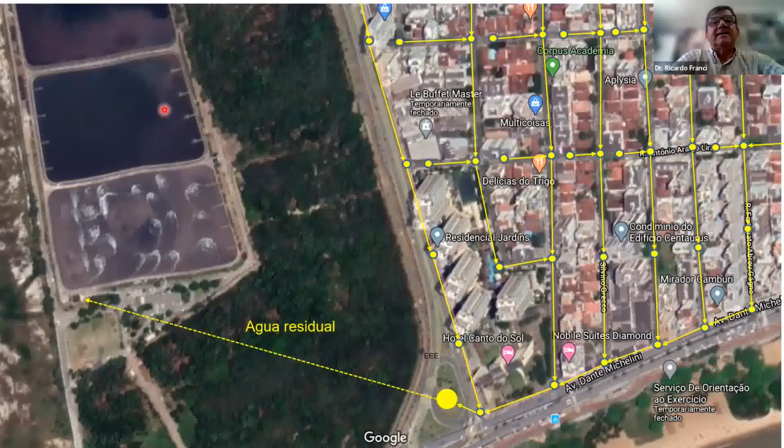If the idea is to practice reusing urban wastewater, it is necessary to produce good quality reuse water, and this water can come back to the buildings in a water supply network, which would configure a double network. This is an issue because it becomes too expensive to build and bring the reusable water back towards the residencies.

Thus, we've considered as a more simple solution to practice reusing water at the building level, at the edification level. And thus, we are working with this idea of separating the different water currents in the buildings themselves. And then, of course, greywater has a strategic interest due to its characteristics of quantity and quality.

So this becomes a model that has been conceived and developed by Professor Ralf Otterpohl in Germany, who proposes a system for drinkable water that comes in from a public system. Number two would be blue waters, which would be rainwater, where in Brazil, depending on the region, we have very intense rainwater, and it must be considered.

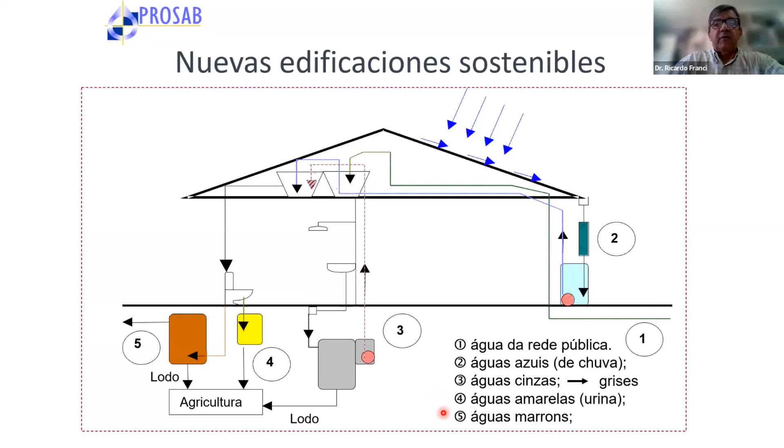Then we have gray water, which is produced constantly, and thus it is interesting to consider this source for the case of reusing. And then you see different additional currents, the yellow water and brown water, which together make up what we call black water.

Based upon this model itself, in 2019, in Brazil, we have carried out the first technical norm and regulation for the use of alternative water sources in edifications and buildings. This is a very important point for the practice of using alternative sources of water in Brazil, because up until this year, there had not been a regulation or a norm to cover those who were truly interested in making the most of this alternative source of water.

So in our new norm and regulations, we have sources of rainwater, pluvial drain water, phreatic level water, clear water, light gray water, dark gray water, black water, and residual water, as potential water sources for different edifications. And these are authorized.

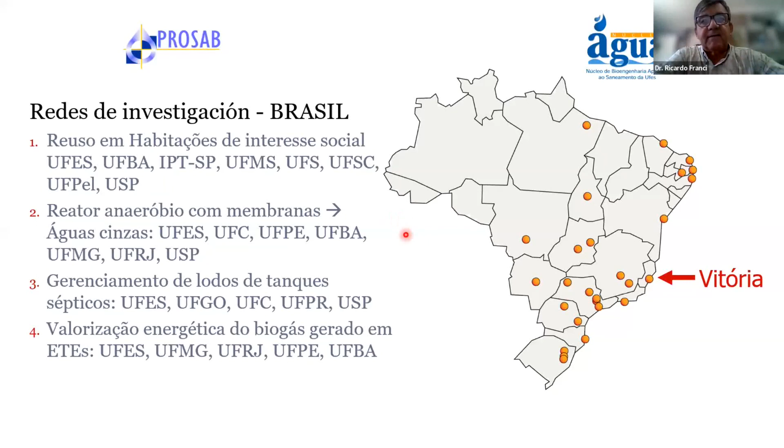I had the possibility of coordinating this national network for 5 years, with results that we consider of great importance and which are even the basis of the new Brazilian norm for the use of alternative sources of water.

I will present a summary of our main results, the results of these research projects. The first investigations were concentrated mainly upon water conservation in these different edifications. And well, the main point here is that water conservation becomes the result of a decrease of the demand and an increase of the water offer.

So to decrease water consumption, it becomes of great importance to work with water saving equipment, loss reduction, sectorized consumption to be able to use correctly, and combat waste. And on the offer side, we have talked about making the most of rainwater and other water groups which are alternative water sources.

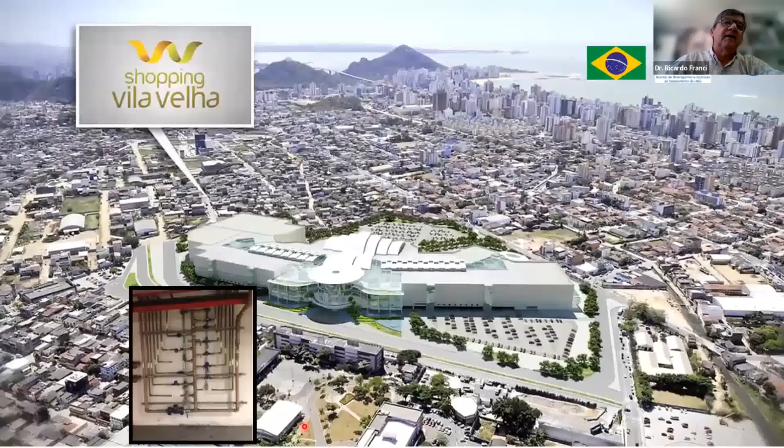An issue I believe that is important. We worked with this Austrian software, which is free and thus can be used after a well-detailed measurement to be able to build this graph correctly and identify the different pathways of water in a building.

Well, our research team has also worked on several edifications for residential buildings, where the idea of the reuse of greywater is to change the water sanitary system. We go towards segregating and separating greywater, which would be the product of the water use due to showers, washrooms, the washing machine, to be able to produce clear water and thus treat at a greywater treatment plant, and to use this water

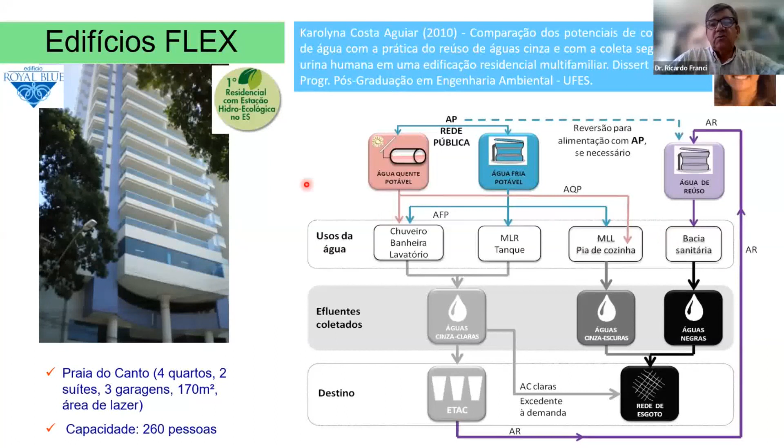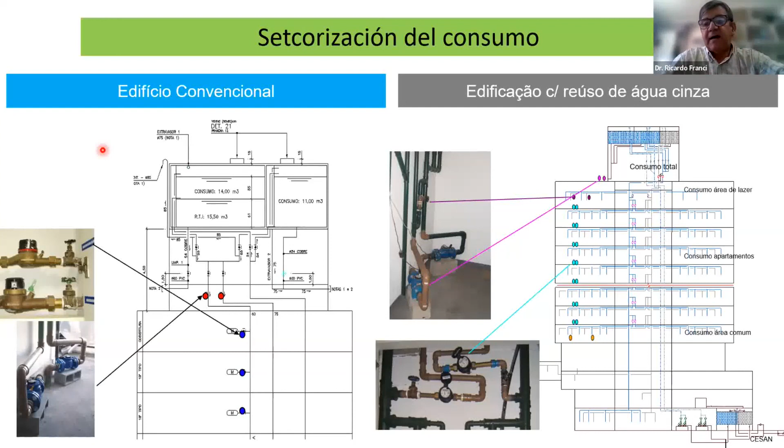for the sanitary discharge. So this becomes a model which today brings us many buildings in Brazil which are practicing water reuse on these types of hydrosanitary systems. And for this purpose, for those who know the pathways of water, it is important to apply sectorization. So, these types of practices of reusing greywaters demand joint work of multidisciplinary teams with architects, engineers, treatment biologists and chemists, so that projects become complete enough.

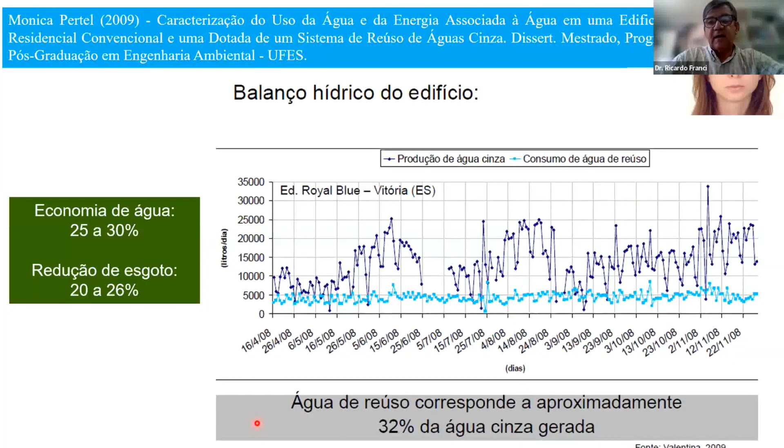especially in Brazil, where water flows that come from the showers are quite high, and in general, the consumption per Brazilian capita for showers is quite high. So it is impossible to reuse this whole flow of greywater because there's not enough demand. And reuse waters correspond to 30% of greywater collection.

Another important point is characterizing greywater. And since 2005, we've worked on characterizing different greywaters, different edifications, different regions, different levels of our population. Greywater from one building where rich people live would be different from the greywater produced, for example, in the dwellings of the poorer families. So it becomes of great importance to know the characteristics to develop treatment strategies.

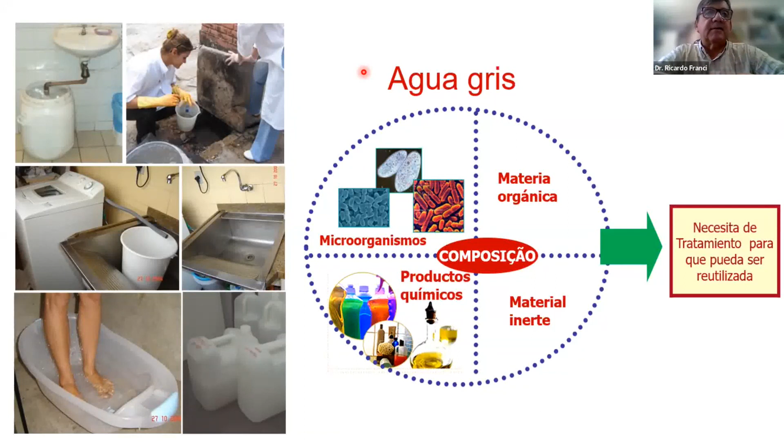So, in summary, greywater contains microorganisms, organic material, chemical products, and inert material. And it's important to carry out a good treatment. We have different sources of greywaters. For example, the washroom, showers, this is for clothes, this is for the kitchen, and there's a mix of water consumption.

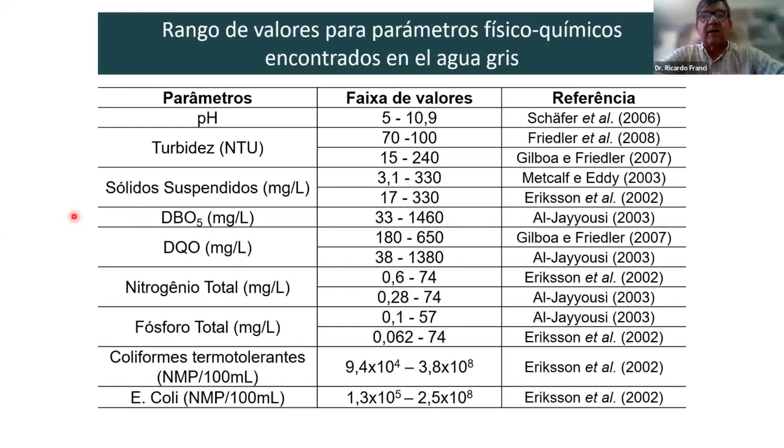This is just a summary of several of the publications. It is important how greywater has very little nitrogen, and that's why it becomes important to calibrate this relationship with phosphorus. Because if we don't have an adequate carbon, nitrogen, and phosphorus relationship, we could have biologic growth issues. And if the treatment practiced is biologic, we could have growth limiting issues. And finally, we will not be able to achieve an adequate efficiency.

The main point is that at the end, water has to have nice characteristics for users. This becomes of great importance to avoid rejection. At the beginning of our research, of our experiences, we thought that a very simple treatment system may be interesting enough.

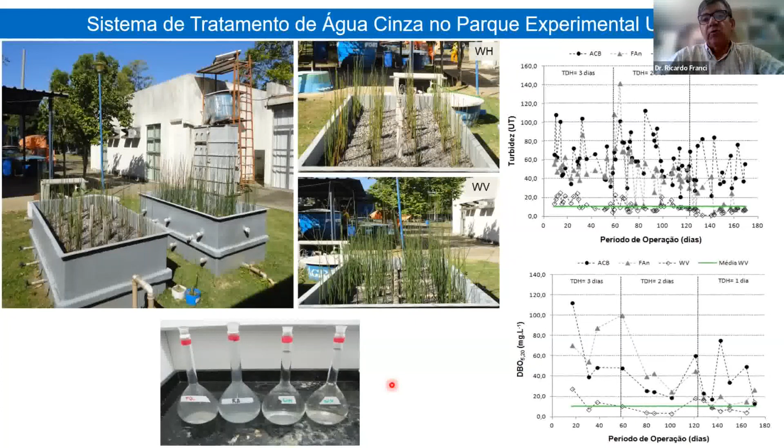However, reuse water with a bit higher fogginess is a bit more complicated for users, who in general would reject this water. So in this case, it becomes difficult to produce reuse water for very sensitive systems. This is an important point.

The reuse water has to be very similar to drinkable water so that users do not perceive an important difference between them and do not reject reuse water, because a system where users have questions about the water or its quality is not sustainable.

People usually are more concerned about the organoleptic properties of water, whereas for technicians what's important is its content, which can have, for example, pathogens. It mustn't degrade water use, but for the users, what's most important are organoleptic characteristics.

Our experiences with treatment. Well, water treatment can be done with physical, chemical, and biological processes that can be associated. The important point to note is that reuse water can't have an unpleasant odor or a high cloudiness, because if not, it will be rejected by different users.

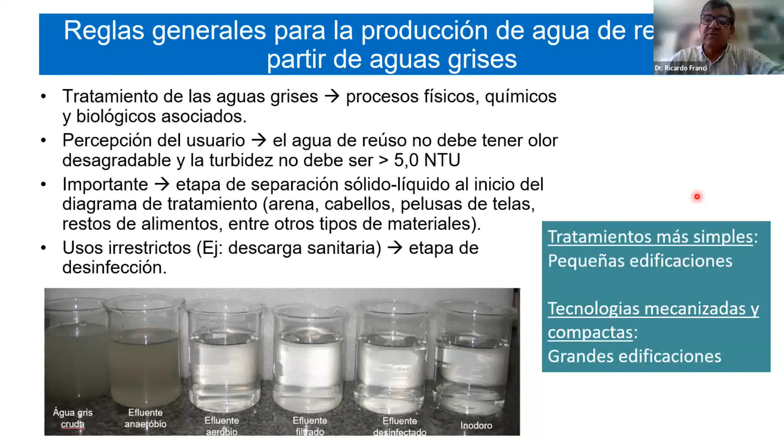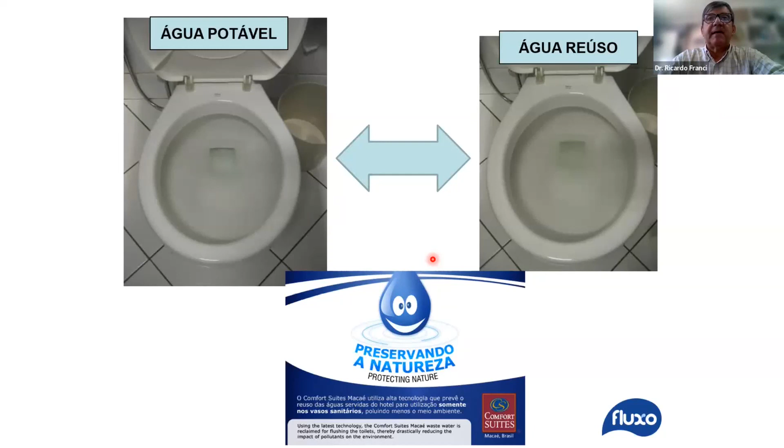Another very simple rule is that for one-family dwellings, it becomes possible to use simpler systems, like, for example, wetlands. Now, for multiple-family dwellings, the capacity becomes important, and in this case it becomes necessary to mechanize different systems. The main point here is that we must always consider the possibility of rejection by users due to perception issues of bad quality.

In Brazil, there are many, many gray water treatment plants. Physical-chemical is like for drinkable water, with the use of coagulants, decantation, filtration, and finally disinfection of the water. In gray water treatment plants, ETAGs in Portuguese, the physical-chemical methods are cheap, but need constant supply of coagulants and chemical products. Additionally, they are not capable of removing organic material that is dissolved in the water. So that is the main issue.

If water will stay for a period longer than 24 hours, for example, in different reservoirs, there may be a possibility of smells. Thus, we have to consider this point. The different biological treatment stations in general are more expensive due to implantation and construction, but are cheaper in the long run for operations and maintenance.

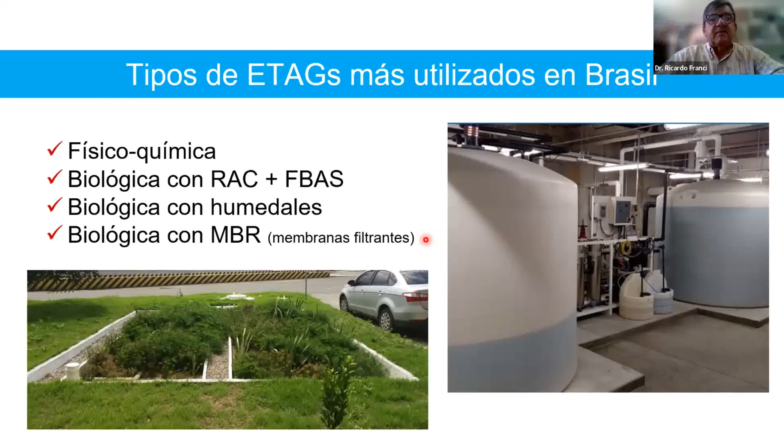The stations with wetlands are usually cheap to install and operate. However, in general, they use very large areas. They usually are used for smaller water flows. And finally, there are gray water treatment plants in Brazil with filtrating membranes, but Brazil does not produce its own filtrating membranes. Thus, it becomes an issue for maintenance of the stations because it needs to import them. However, these are very efficient stations, even though they consume an important amount of energy.

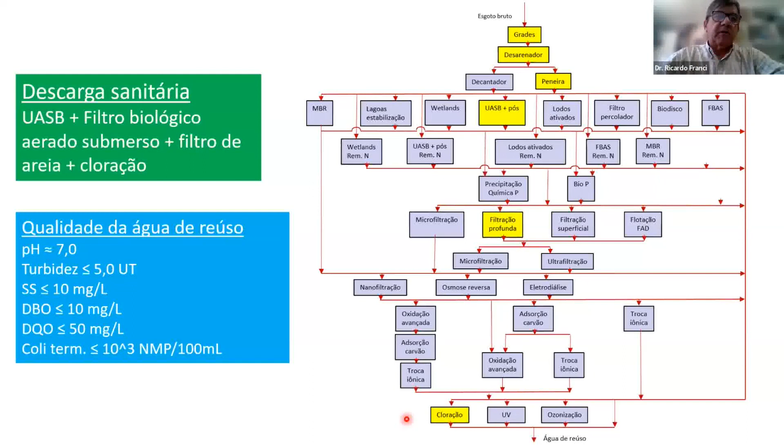So, this is just a quick scheme of the different possibilities of combining processes: for example, preliminary treatment, which would be screens and desanding, then biological processes with filtering, and finally chlorine application for disinfection, where there are different alternatives, evidently with different costs associated to them, according to the complexity of the technology. I've only talked about membranes, which are very efficient. However, they are expensive, and in Brazil there is this issue of import.

In this program of technological development of the federal government, we have developed a technology for biological treatment that combines two high-rate reactors, in other words, with short water retention times, which at the end allows gray water treatment plants to be compact and small enough.

And here we have, and consider important, an anaerobic stage, because even though gray waters aren't as concentrated in organic material, this stage allows elimination of, for example, 50% of BOD without air, without the need for mechanizing. The removal of 50% of organic material is important for the economic viability of the project, because power consumption weighs heavily on the economic viability of reuse.

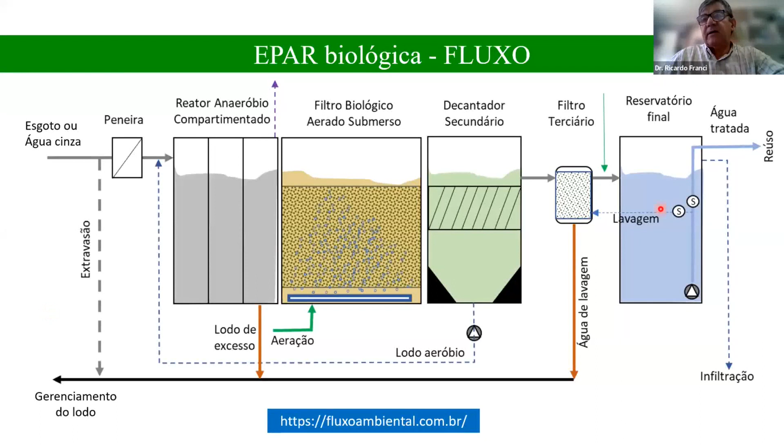After the anaerobic stage, there's an aerobic stage, in which we work with biofilm reactors. Here we have a biological aerated submerged filter. Then we have a secondary decanter, a tertiary sand filter, and disinfection with chlorine at the end. And well, the wash water and the discharge of biological sludge usually go to sewage systems. And at the end, we have our reuse water ready.

This combination of processes can generate very compact stations, like in this case, as presented here. Here we have all of the biologic processes. This would be the gray water mesh, the biologic processes associated to them, the sand filter, and the chlorine application. And these graphs present the results of the treatment.

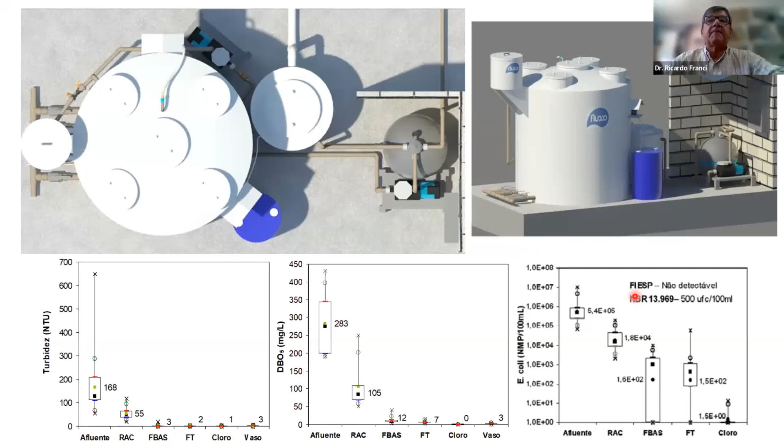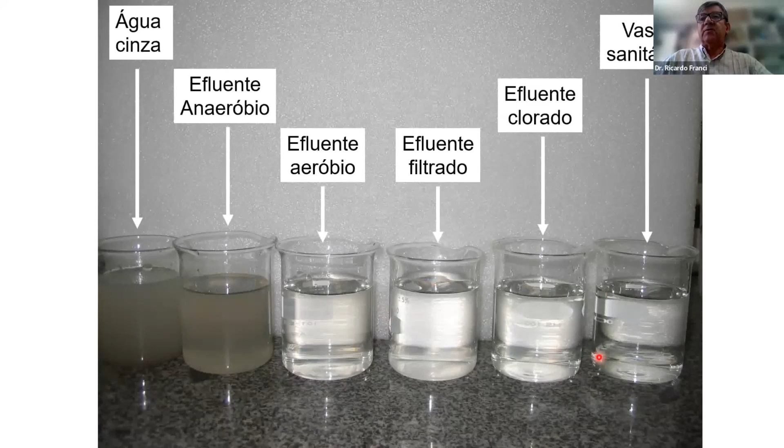So we have cloudiness, where in the glass, the last step would be for toilets. So we have the different stages, anaerobic stage, filtering, disinfection, and quality for flushing, with cloudiness and bacterial counts in control. And this would be the usual aspect of gray water over the different water treatment stages towards its final use for flushing toilets.

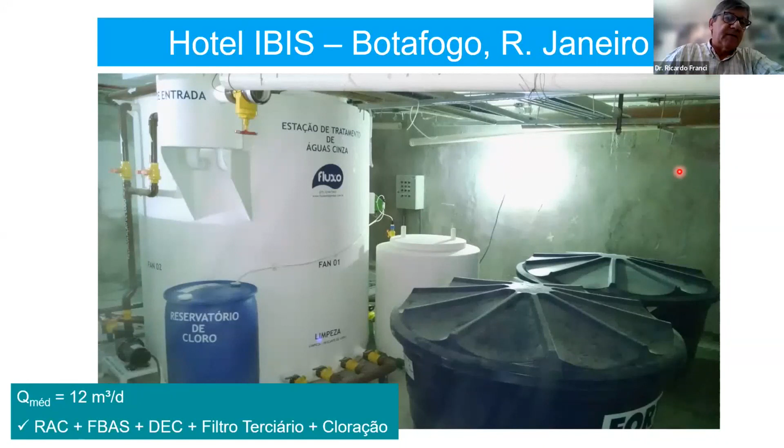Here we have the plant that is installed in a hotel of Ibis in Botafogo, which is a Rio de Janeiro neighborhood. It is a plant for 12 cubic meters per day, and the point of economic viability, which for us is of great importance. Today, our company, when a commercial technical proposal is made, always presents to clients a preliminary study of economic viability.

And this study was carried out in 2004 by the construction company who built this building. It is obviously a complex table with many figures, but of great importance is to notice that among all the investments to build this edification, this full water reuse system presented a cost of a little bit more than 1% of the cost to build. So of the whole 5,500,000 reais, more or less, the Brazilian currency, a little bit more than 1% is equivalent to the value of the whole reuse system.

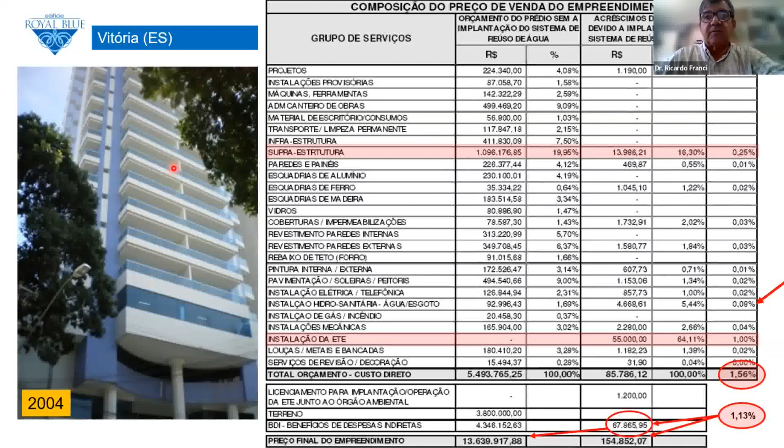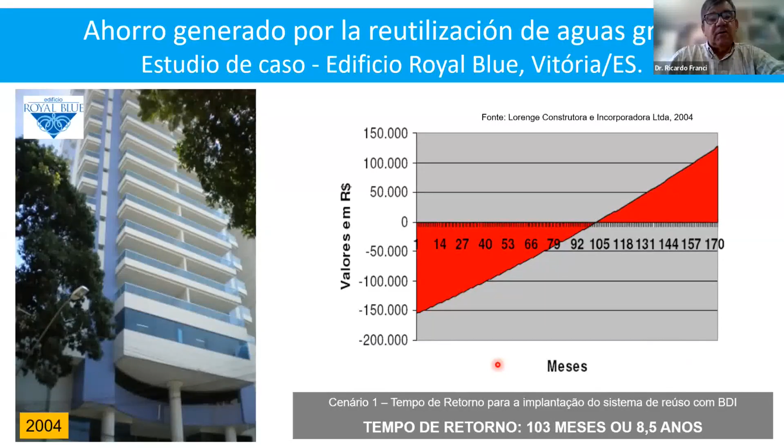Even the change of the hydrosanitary system to separate gray waters and black waters, and supply of drinkable and non-drinkable water, and evidently the water treatment station. The same study presented a cash flow, the payback, which was calculated for 8 years and a half. And in practice, the payback in this case was 7 years. Well, the system is exceeded after 7 years of work and functioning.

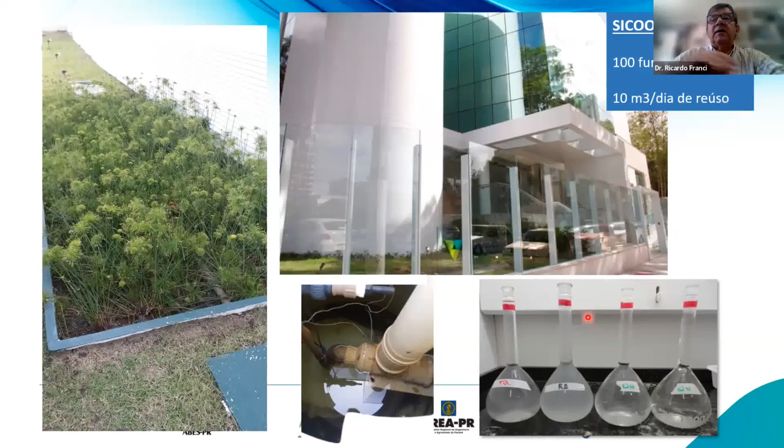Well, I will go to some examples very quickly. For smaller systems, we work greatly with wetlands. We like these technologies very much because they are very simple. The operational demands are small, and the owner of the building in general is very satisfied with the end results. This is a bank, a financial bank, which has 100 workers, and the use is 10 cubic meters per day.

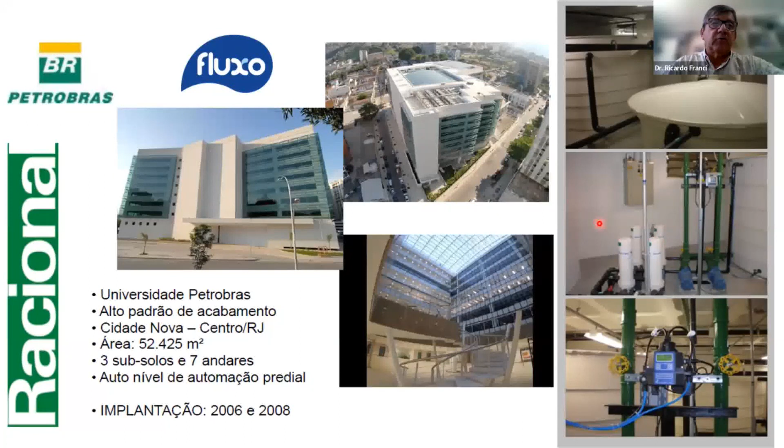We've carried out larger reuse systems, like, for example, this is the Petrobras University, Petrobras being a large Brazilian oil company, and its building is in the center of Rio de Janeiro. It is a system that produces water for reuse and which also has an expert system for monitoring the quality of reused water, and to authorize or not its correct use in specific systems. In this case, with a cloudiness meter, here we have different filters for producing reuse water. Another system, with interesting capacity, 70 cubic meters per day in the Rio de Janeiro center.

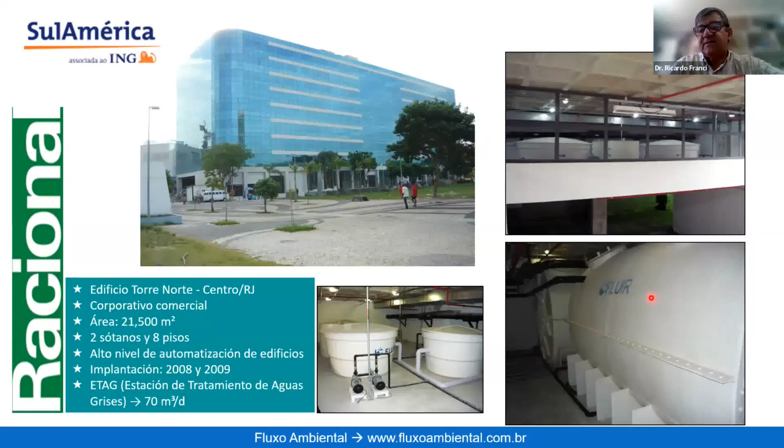These are curiosities, because sometimes builders, constructors and architects make their projects thinking of reusing gray water and reusing rainwater. However, they do not consider the technology for treatment, and installing a water treatment system becomes complicated, because during the project itself, they didn't consider an area or adequate access for the installation of the treatment plant. So this is an issue. For example, this tank here is cut off because architects and engineers forgot to build an adequate access for transporting these tanks. So an issue which is very common.

Another large building, another Petrobras oil building, for 3,000 employees. And in this case, we didn't use gray waters. The wastewater was a mix of gray water and black water of the whole building, and for this reason the treatment system is more expensive and more complex, to be able to produce reuse water of high quality. Where does the water go?

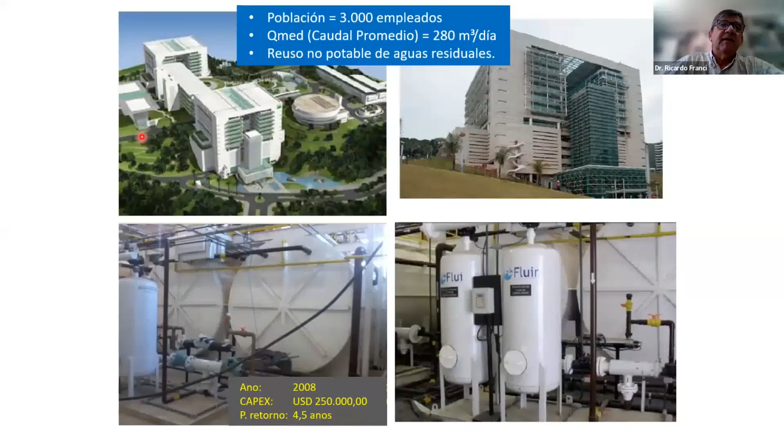Towards irrigation of the whole hard garden and the flushing of the toilets.

Another system for Rio de Janeiro, where this becomes a building that makes treatment...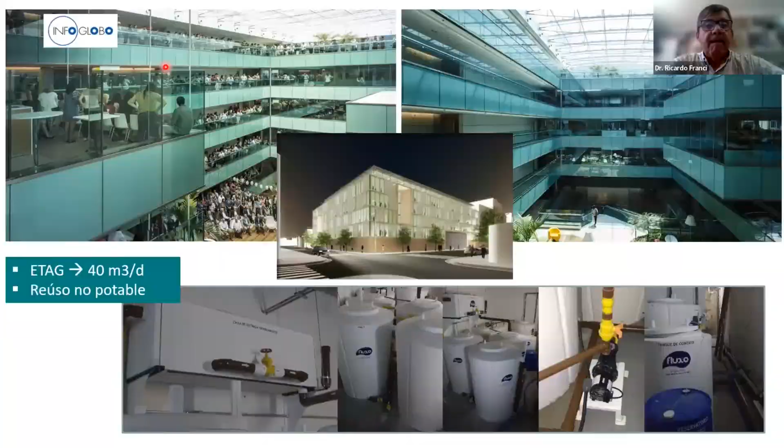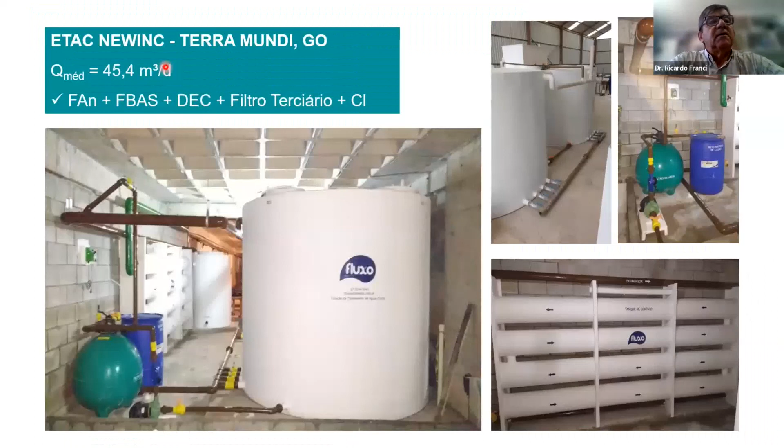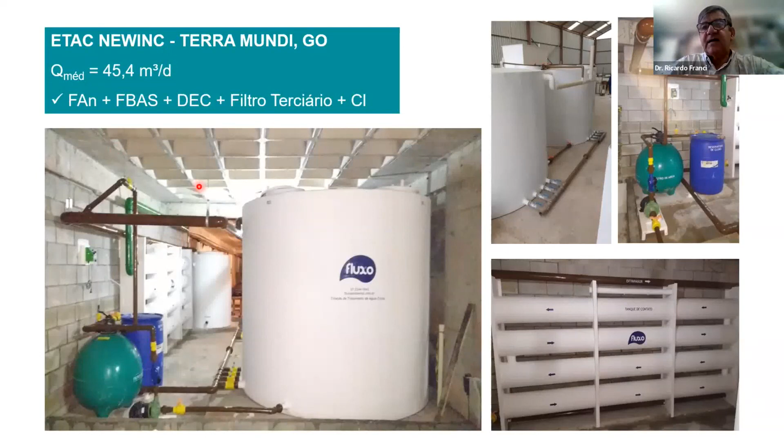for a large television network in Brazil, another corporate building from Petrobras in the city of Salvador in Brazil, 7 cubic meters per day. We have different examples of gray water use in buildings in Brazil and many regions of Brazil, always with our biologic-based systems with tertiary filtering and chlorine application.

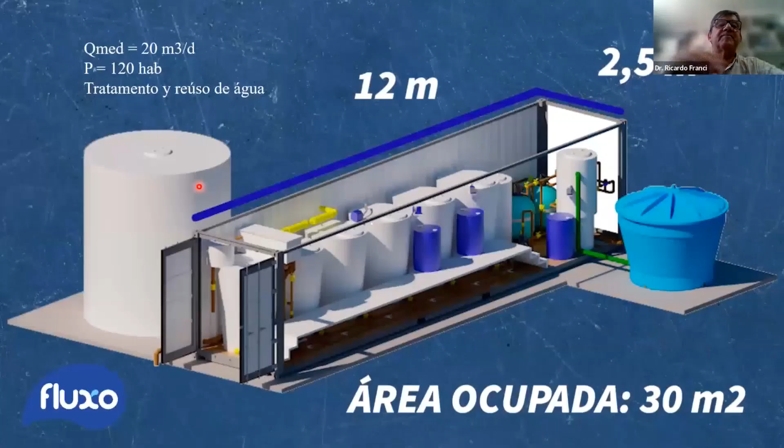And we also have gray water treatment stations in some of the important industries, for this case, of the center-west region of Brazil, where it becomes very common to have a period of 6 months of intense precipitation, and a period of 6 months of drought, a characteristic of this region. That's why the reuse of gray water.

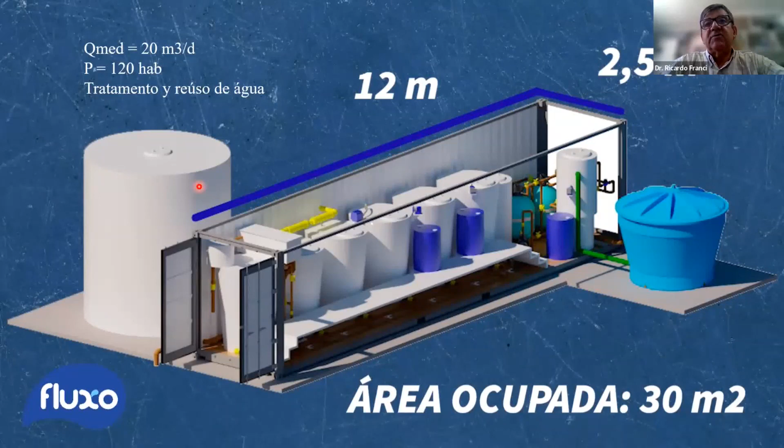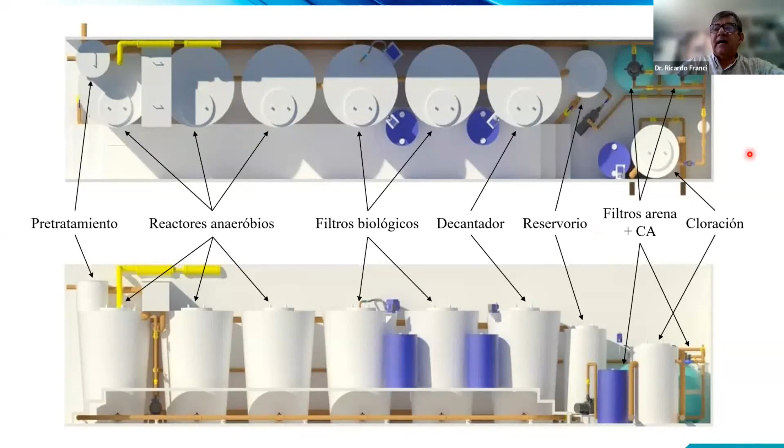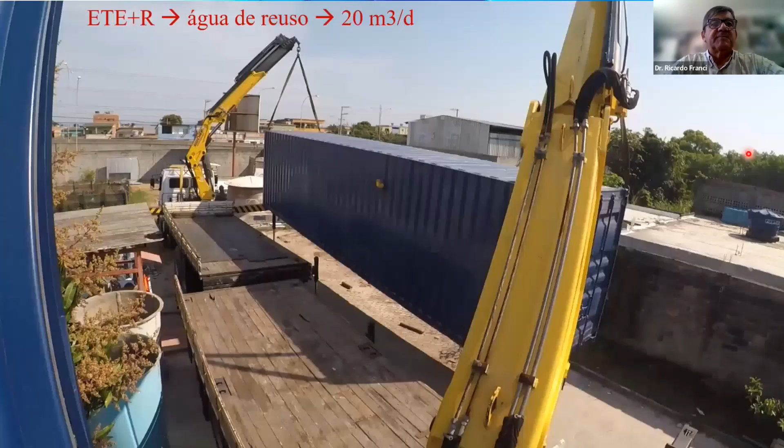And today we also have a more container-based solution, able to transport all of the water treatment stages installed inside of a container. Here we have pre-treatment and anaerobic reactor, the decanter biologic-based system, reservoir for pumping water to the filtering station, and finally chlorine application. This is the aspect of the plant, the depurifying plant inside of a container, transported and installed on site.

The arrival at the functioning plant is for an industry of Rio de Janeiro also.

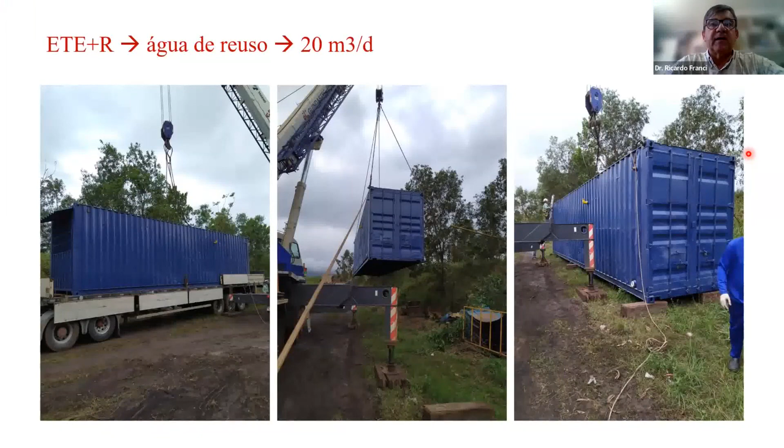And likewise, we have done different production plants for reuse, starting from gray waters, for the Antarctic station in Brazil, the Brazilian Antarctic station. Here a combination of gray water reuse, which is part of the system, with the black water treatment, which is very sensitive for its application.

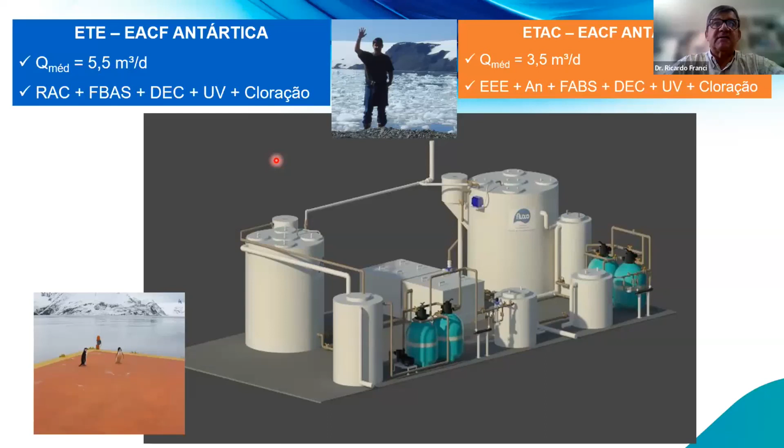And even though it seems incredible, 10 years ago or so, we had serious issues with the availability of water for feeding our Antarctic stations.

In other words, the use of these sources does not necessarily mean it has to be done today. This is a decision of the condominium, of the owner of the building itself. However, it becomes important to consider a future where there is not sufficient water for all, because this is a real question. And if the building has the possibility of switching from conventional drinkable water to the consumption of both drinkable and non-drinkable water in the future, it is a guarantee of water resources and an improved quality of life for us.

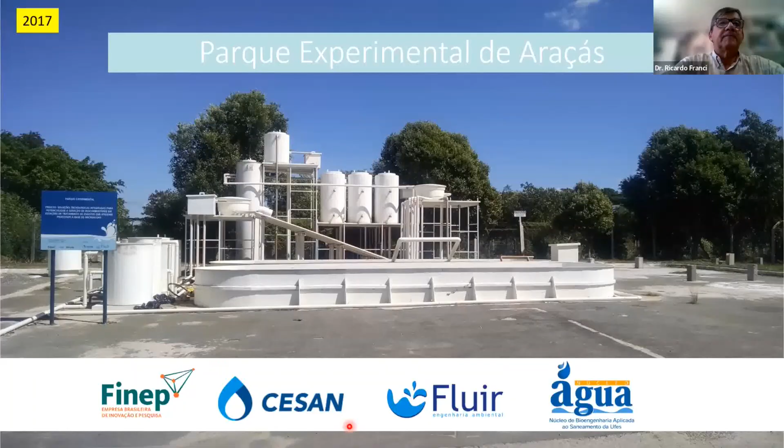And here we have our research centers, which are well structured. In fact we have two research centers, one for ecologic treatment, another for residual water treatment, in agreement with local companies for developing technologies. We have labs which are relatively well equipped, and of course, we are always looking to cooperate. For us, it would be a great pleasure to cooperate with Chilean colleagues on this specific issue and other issues related to residual waters.

Here we have some of our recent cooperations, some of which continue to work. They have a tradition of cooperating, which is important, always in contact with our colleagues, specifically in our field and industry.